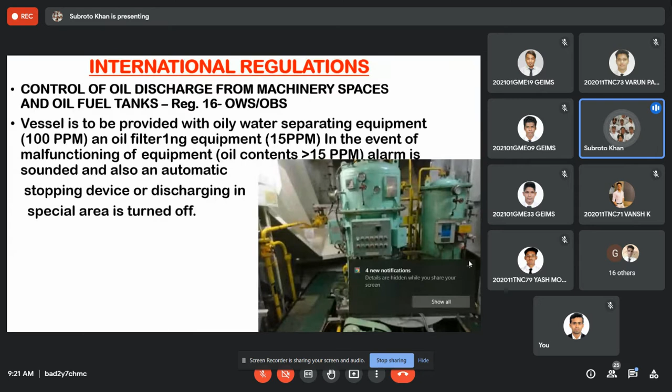So these are the 5 regulations: en route, should not be in a special area, should be less than 30 liters per nautical mile, maximum should not be discharged more than 1/30,000 of the total cargo carried. So if you are satisfying these conditions...

The major equipment related to cargo operations in a tanker is first and foremost the ODMCS, Oil Discharge Monitoring and Control System, which monitors 30 liters per nautical mile and also adds up cumulatively to find out how much oil you have discharged. This equipment is automatic, whether on large or small ships. Once the oil goes more than 30 liters per nautical mile, it will automatically stop.

This is all related to tank cleaning. Here there are no leakages as such, though leakages are also taken care of as part of this. So the major quantity of oily water mixture which comes from cargo spaces is due to tank cleaning. In tankers, it's a regular operation to change grade, and to change the grade you have to do tank cleaning. So when you're doing tank cleaning, whatever oily water mixture is generated is stored in the slop tank.

And from the slop tank, whenever these conditions are met, outside the special area and all that, the criteria is also 50 nautical miles from the nearest land.

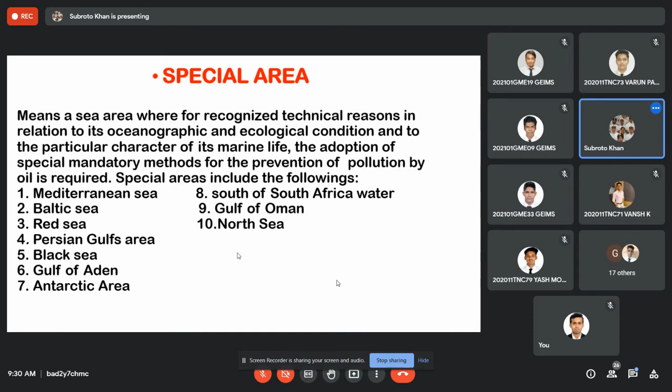Any questions on Annex 1? No question.

Annex 2 is, this is a SOPEP manual and this is a SOPEP kit. This is a SOPEP drill.

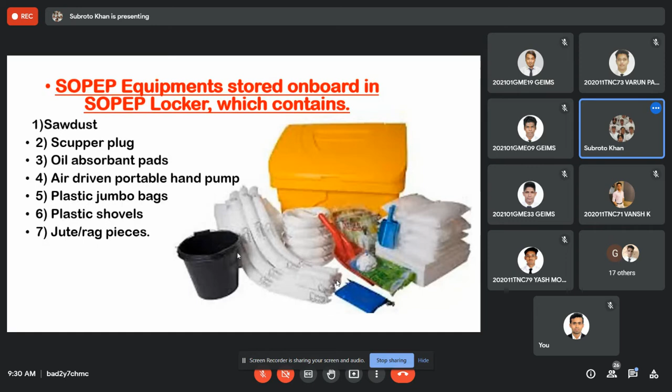Every month, every 2 months, depending on your company policy, you have to have a SOPEP drill, wherein everyone takes part in ensuring that any kinds of pollution is able to be controlled. Once a year, you have a drill with the company as well as the authorities, which may be DGS in our case, Director General of Shipping, and all other authorities take part in that drill once a year.

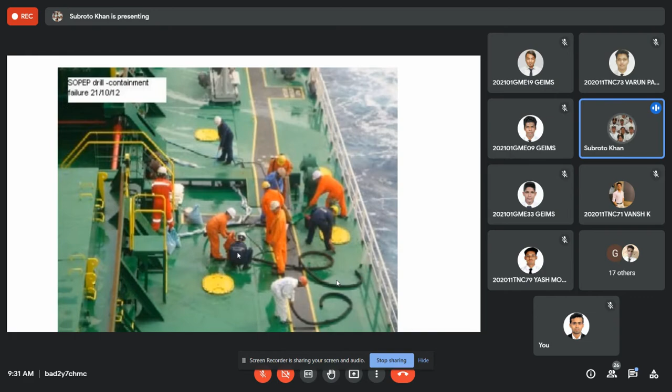So next is Annex 2. Annex 2 also came into force that time, same time, October 83. These are rules basically to ensure that similar kind of ships to tankers, that is chemical carriers, are having regulations related to prevention of pollution. The pollution caused is even more drastic because they sometimes carry toxic material and other kinds of harmful substances which can be very corrosive and harmful, in which case what to do is given in Annex 2.

So broadly speaking, the important part of Annex 2 is the categorization of chemicals. They are technically known as NLS, noxious liquid substances. And in layman's terms, it is called the chemicals, applicable for chemical carriers or NLS tankers. The major part is the construction and categorization of cargoes. The cargoes which are carried on chemical carriers are categorized depending on their hazards to the sea when they come into contact with the sea, and they are categorized into X, Y, Z, OS.

X, Y, Z, OS. X being the most hazardous, Y being lesser than X, and least being Z. Whatever does not fall into these categories comes into OS, and OS is absolutely harmless, similar to fresh water. So the categorization of the cargoes is X, Y, Z, OS, and depending on how hazardous the cargo is, which is X, you have different rules.

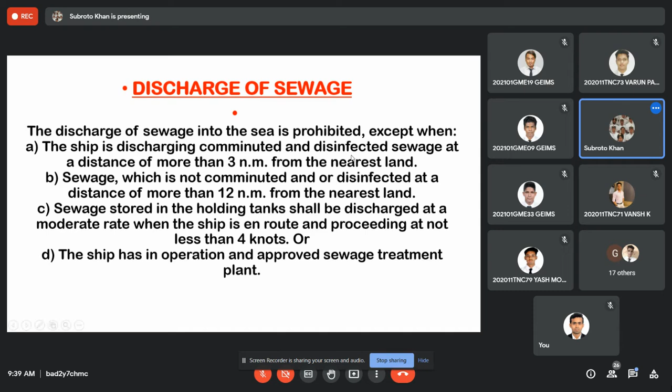Again, so this is in short about the sewage regulations. Got it?

Okay, sewage done. Next is garbage. It's very simple. Earlier it was all complicated because there was a lot of categories of garbage which could be thrown overside, like glass and tin and wood, all had different regulations and made life complicated for the ship staff.

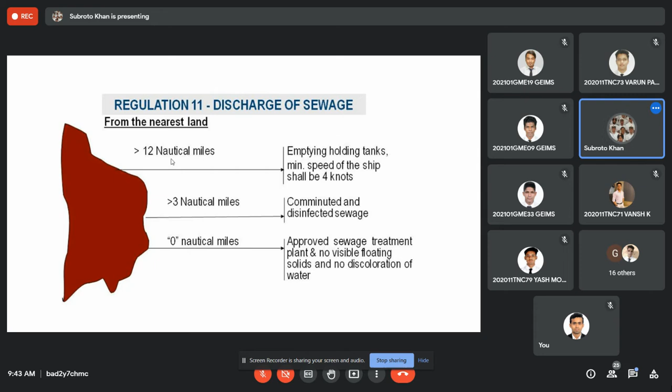Shore reception facilities, that is the last resort. But everything you cannot discharge to shore facilities, and you have to store the garbage till the time you reach the port. At times you may not reach port, you may be at anchorage, or at SBM or sea terminal, where it is very difficult to get these facilities offshore.

In which case you have to store it and incinerate it, which is the best option possible. But certain cargoes cannot be incinerated, certain garbages cannot be incinerated, like plastics, and you have to know how your incinerator functions and accordingly use it.

Everything has to be recorded in the garbage record book, and there's a garbage control officer, which is likely to be chief engineer or chief officer in some cases, depending on the company policy. MARPOL does not tell you who should be; MARPOL says someone should be a responsible person. Mostly chief engineer or chief officer is responsible for managing the garbage on board, in which case he has to ensure that the garbage log is maintained, the equipment is maintained, and everyone is trained accordingly.

Garbage regulations have got some other requirements also. It has to have a garbage management plan, garbage management log, and also garbage related posters should be readily posted in all locations such that everyone is aware of what is to be done and what is not to be done. So three things: placards, garbage management plan, and garbage record book is the paperwork associated with garbage management. And of course, everyone should know the do's and don'ts.

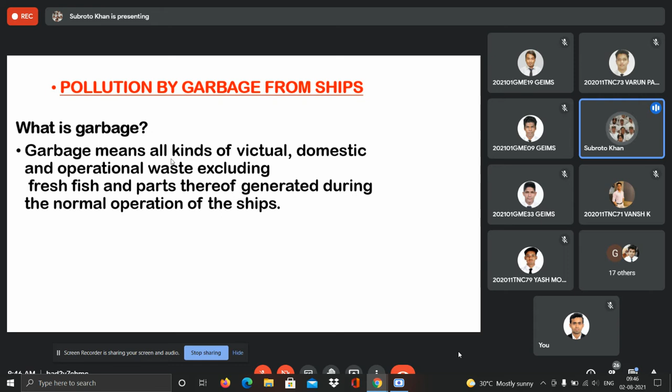Any questions? No questions, sir. Okay.

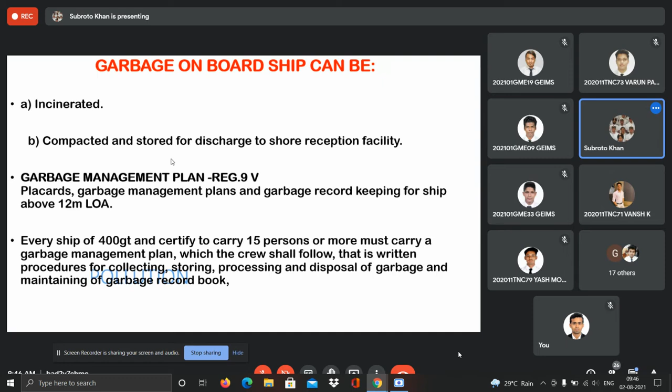This is a summary of the requirements to comply with the garbage rules and regulations of MARPOL.

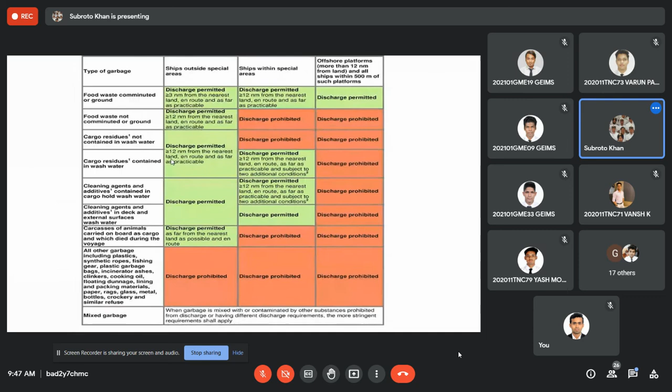Food waste is in the galley, which is blue in color. Domestic waste is green in color. Oily rags and cooking oil is black in color. Incinerator ash is gray in color. Operational waste is in the engine room, which is yellow in color. And hazardous waste is red in color.

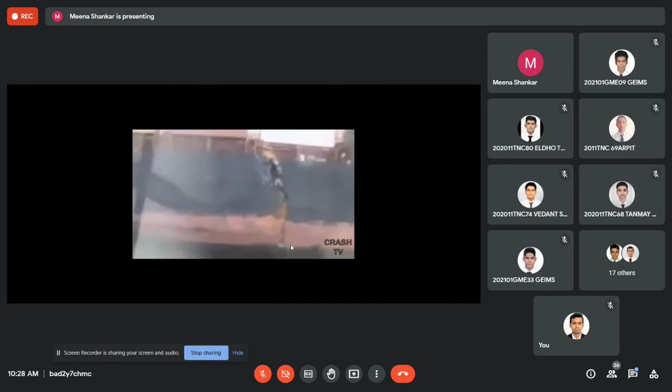It's just broken in the center. See the cargo, just listing to one side. It has made the ship also lose its balance. That is called cargo stowage, has to be done properly. It hasn't been done.

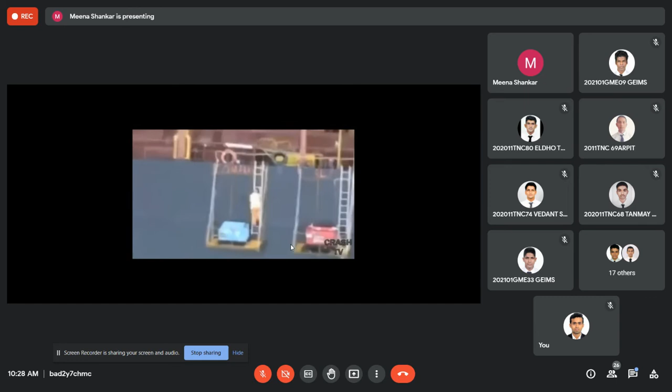Maybe they had to do the jettison of the cargo.

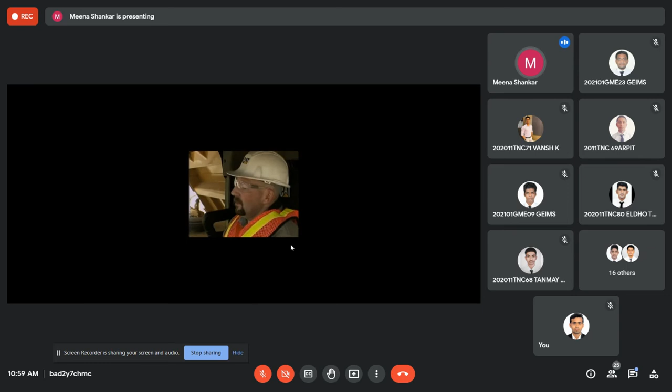Before we look at ways to reduce the possibility of fatigue, it's important to recognize the symptoms: sleepiness, difficulty keeping your eyes open. These are all the symptoms of fatigue. You're not able to keep your eyes open, it is closing. They'll ask you what are the symptoms of fatigue.

Excessive yawning, blurred vision - you're not able to see well, not that you lost your sight. Loss of focus, irritability - you're getting angry for no reason. Becoming quiet and withdrawn - you suddenly become quiet and learn to be away from others. Inability to concentrate - you're not able to focus on the keywords or main points.

Can't remember what you did in the last 5 minutes - memory loss. Lacking motivation to do a task well - lack of motivation in doing tasks, you don't like to do the work. Sound familiar? Sure they do. We've all experienced some of those problems.

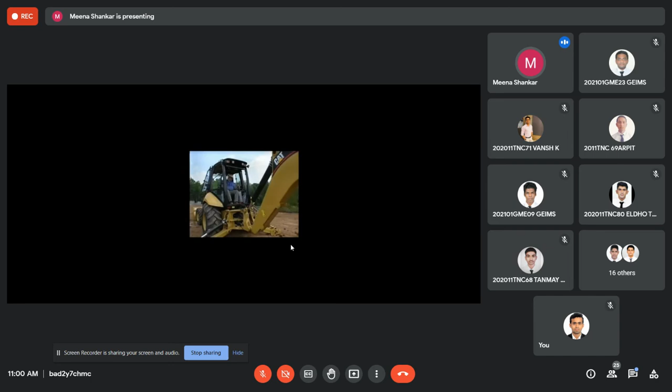It's even more likely you've experienced those symptoms if you work outside the typical workday. Our bodies are designed for peak performance in daylight. That unchangeable fact of life creates challenges for the high percentage of people who must work long hours, nights, irregular shifts, or at high altitudes. This shift work creates unique lifestyle issues - it affects your sleep, your alertness, your overall health, your family and social life, and your safety.

Minimizing the impact of those issues starts with taking charge of your life. It starts basically enough with those key health practices we all learned years ago: diet and exercise. Note this down, very very important to avoid fatigue is to keep your diet and exercise on.

For a longer energy boost throughout the night shift, eat a high-protein, low-fat dinner centering on lean meat, skinless chicken, or fish. Complex carbohydrates work well too - those include pasta, rice, or potatoes, whole grain breads and breakfast cereals, fruits and vegetables.

But it's more than just eating the right foods - it's avoiding the wrong foods, like fatty red meats, pastries, salty snack foods such as potato and corn chips, whole milk dairy products, and candy, which can provide a short energy burst but is followed by a crash to a more fatigued state than before. High carbohydrate diets are best for those working at high altitudes, where large meals are poorly tolerated. Non-caffeinated beverages such as cocoa, juices, soup, or sports drinks are good choices, and drinking plenty of water is important for everyone at any altitude.

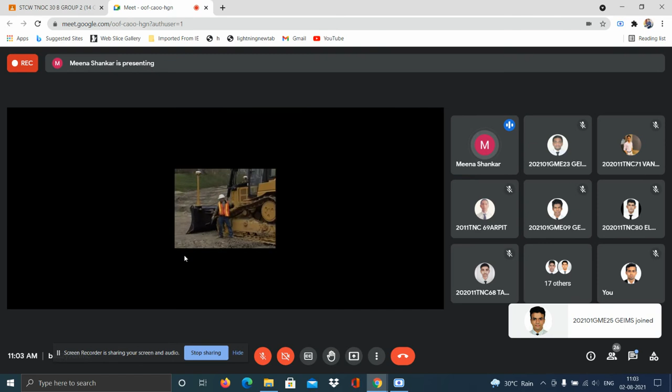Exercise can have tremendous physical and mental health benefits. But exercise can also improve alertness and combat fatigue. Shift workers who exercise regularly feel much less fatigued and experience fewer muscle and back problems. They also make fewer mistakes than coworkers who do not exercise regularly. High-intensity workouts aren't necessary - low-level exercise, even taking a walk during your break, may help maintain your alertness. Just doing enough to elevate your heart rate for 20 to 30 minutes several times a week can work wonders.

For the third key way to reduce fatigue: sleep. He spoke about diet - high protein and less fat. Exercise is very important to avoid fatigue and remain alert. In diet also, he says candy will give you energy, but it might add up over time and become negative because sugar level goes up, and it might make you feel tired.

Sleep is the third thing. We've discussed the obvious advantages of sleep, but those can often be elusive to those who must sleep during the day.

Our bodies are programmed for night sleep, so daytime sleep can be shorter and poorer quality than night sleep. Shift workers quickly find it helpful to develop a pre-sleep routine. Anything done regularly, from reading to watching television to listening to music, can help your body acknowledge you are preparing to sleep. Shift workers also learn to manage their sleep environment as much as possible.

That means controlling factors like light - keep the room as dark as possible, or wear a sleep mask. Noise - use a fan or earplugs to block noise. Temperature - a room temperature around 65 to 68 degrees Fahrenheit, 18.3 to 20 degrees Celsius is best for sleep. Blankets - use them to stay warm and induce sleep. Air circulation - use a fan to ensure good airflow.

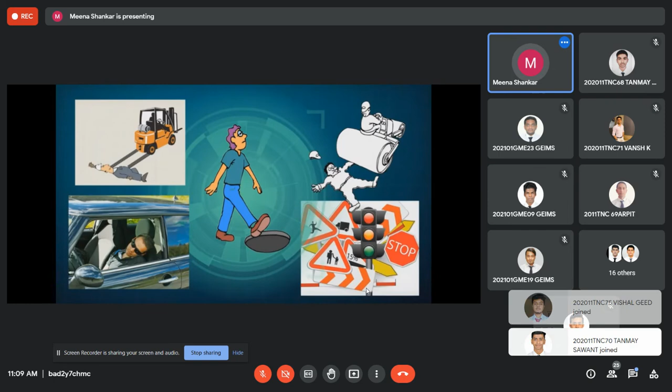That's enough time to run off the road, hit someone with a forklift, run a red light, or be able to get yourself or others out of harm's way. They don't call them split-second decisions for nothing. Sometimes that's all you get, but if you're tired, it's harder to make a split-second life-saving decision.

Lack of sleep impairs your ability to make good decisions. Reducing your nighttime sleep by as little as 1.5 hours for just one night could result in a reduction of daytime alertness by as much as 30%. So 1.5 hours less becomes 30% less working quality.

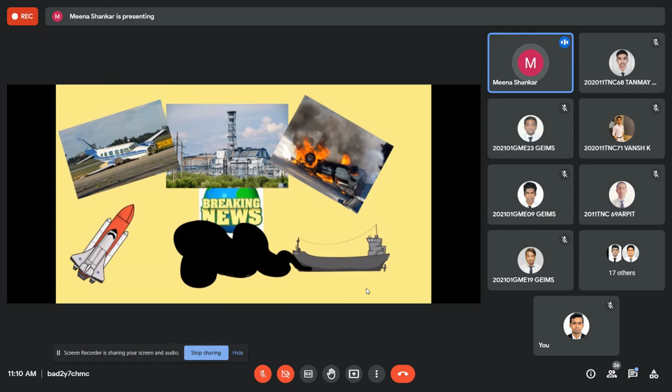Almost every big disaster in recent history has involved sleep loss. 3 Mile Island, the massive Exxon Valdez oil spill, Chernobyl, the Challenger explosion, and many train and plane crashes are linked to sleep deprivation. Out on the road, sleep loss is a huge public safety hazard.

In one study, 1/3 of the drivers reported falling asleep at the wheel in 1 year. In the U.S., drowsy drivers caused more than 500,000 crashes, 100,000 injuries, and 1,600 deaths every year.

Studies show that sleep loss and poor quality sleep will cause accidents and injuries on the job. Workers who experience excessive daytime sleepiness have significantly more work accidents, particularly repeated work accidents. They also had more sick days per accident. Getting less than 6 hours of sleep actually doubles your chance of a work-involved injury.

A lack of adequate sleep not only makes it harder to concentrate on work, it can also distort your ability to see hazards, make you less alert, and interferes with your ability to think clearly and critically about problems you encounter throughout your day.

Sleep plays a critical role in thinking and learning. Since lack of sleep affects your ability to pay attention, your alertness, concentration, reasoning, and problem solving, it is more difficult to learn and to think clearly.

Ever try to reason with a drunk? It has been proven that losing sleep can cause you to become more impaired than a drunk. Lack of sleep affects your judgment and your interpretation of events. This makes it harder to apply your training and experience, assess situations accurately, and act on them correctly.

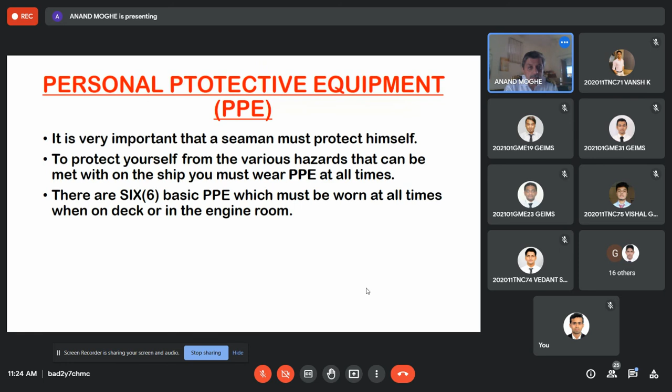What are the PPE which are expected to be worn? Boiler suit, helmet, gloves, safety shoes, safety goggles, ear protection. There are other PPE required when working under especially hazardous situations or locations, but the above are absolutely necessary at all times, whatever is written above will be worn. In addition, if you're on a chemical tanker or gas tanker, you will wear SCBA or a chemical suit or other additional PPE. But the above which I mentioned are absolutely necessary and have to be worn at all times. Copy down.

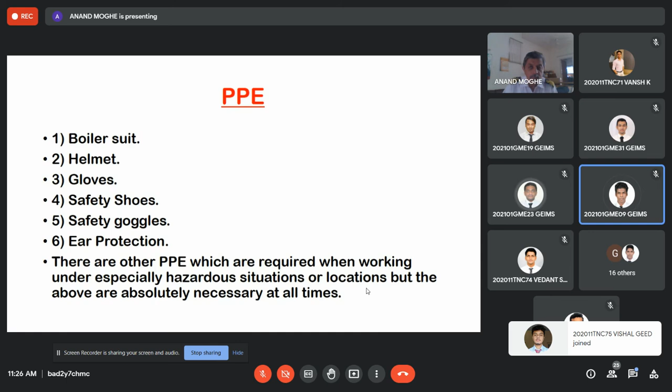Yes, copied gentlemen. Done with it, completed sir. Okay, next what I'm going to talk about is risk assessment.

Everything in life has some risk. What you have to learn is how to navigate it. So when you guys came to Bombay, those who came to the campus from their hometowns, some wore PPE throughout and removed it only at the campus gates. Some carried bottles of sanitizer, kept sanitizing, wore a mask. So everybody evaluated the risk, the time of travel, the modes of transport, how much they were exposing themselves, and accordingly, keeping the COVID-19 risk in mind, they navigated the risk. So anything you do, whether buying a car, making a financial investment, or putting your child in school, you will do a risk assessment. Everything in life has a risk; what you have to learn is how to navigate it. Make sure that you do risk assessment for everything that you come across.

Before you do a risk assessment, you evaluate what is the risk, what is the amount of exposure you're going to have to that risk.

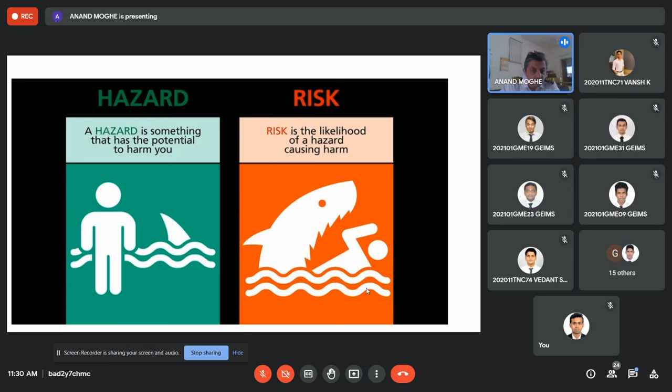Take a snapshot please. Taken, sir. Taken, okay one more snapshot. Can you see? Ek minute, I'll just. Yeah, can you see now? Taken a snapshot, I've taken a snapshot. Hello, yes hello sir, taken.

Next, I will come to what are the hazards on board. There are many hazards on board a ship which are part of the daily routine work on the ship. The majority of the hazards are mentioned below, but remember the list is not exhaustive. I'm trying to cover as much as possible, but that does not mean the list is by any means complete. There will be new hazards which come up, like working on computer circuits, that is a major hazard not mentioned over here.

I hope the TNCs and GMEs are answering over here. Yash Moharia, Yash Acharya, Varun, are you there? Yes sir, yes sir. Syed Baba Rahim? Yes sir. Yash Moharia, Yash Moharia. Somebody just call him, he's not present. Who's the leader of this group? No leader over here. Vansh, call Yash Maharia. Eldho, calling sir, call Yash Maharia. Eldho, come in, yes sir. Vansh relax, Eldho you call him. Vishnu, are you there? Vishnu P, yes sir. GME roll number 22, are you there? Yes sir. GME roll number 9, are you there? Yes sir. Vishal Geed, are you there? Yes sir. Okay gentlemen, once you finish copying let me know, I'll change the slide. Yes sir.

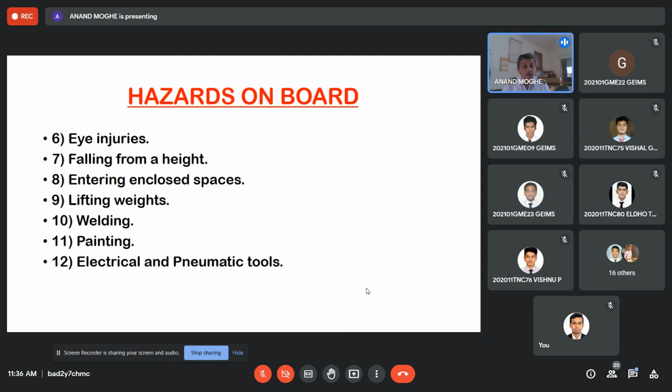Have you copied? Yes sir, done sir. Okay next: electrical appliances in living spaces, welding, cooking in galley.

The numerous hazards that can be encountered on the ship, the most important lesson is to be aware and vigilant at all times. There are numerous other hazards, please understand I cannot be listing all of them. It's not possible to mention each one, any work you do will have a hazard. If you're working with pneumatic air, there'll be hazards. So remember, there will be plenty of hazards, but your job is to make sure you're aware of the work you're doing and vigilant not to injure yourself at any given point of time.

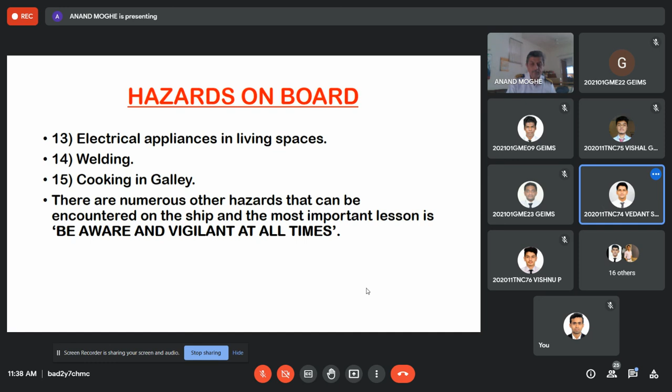Loading, discharging, loading and unloading of cargo on board can by their nature be hazardous. The danger on tankers, gas and chemical carriers is obvious in the nature of the cargo. Even on bulk carriers, containers, general cargo carriers, there are many dangers. Copy down, I'll be listing them individually, but just copy this down please.

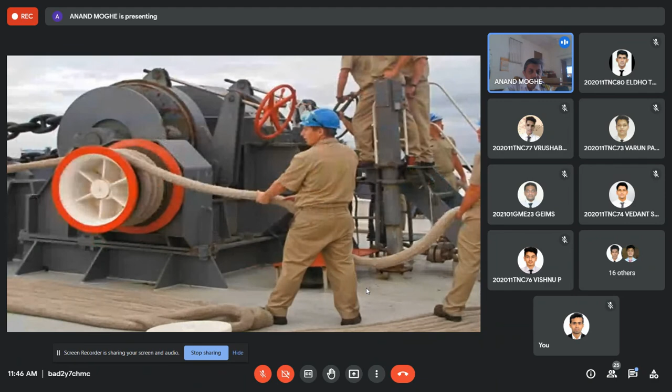Can somebody tell me about these mooring hawsers? Have a look at them, I'll show you these mooring hawsers, that is the size of the mooring hawser. Look at the guy's arm, you can get an idea of how big the hawser is because it's a guy's arm next to the hawser. Can you see that? How big it is?

This is a 64mm hawser. Can you tell me how many kgs of weight it takes? Any rough guess, anybody? Can somebody tell me what minimum safe working load must be there for these ropes? Varun? Sultan? Tanmay? Anybody, can you tell me, GMEs? What is the rough weight that these hawsers' safe working load must be? GME 21, can you hazard a guess? Eldo, I want people to participate, this is not a single forum. I'm not going to talk unilaterally, this is going to be a discussion, so dialogue, not monologue. Please talk to me. Can somebody tell me anything else? GME 19, are you with us?

Yes sir. Can you tell me how much is the safe working load of these hawsers, roughly? It's about 30 to 40,000 kgs. So 30 to 40 tons. How many kgs is 1 ton? 1000 kgs. So 30 to 40,000 kgs or 30 to 40 tons is the safe working load. So when they break, they really break with a lot of noise and a lot of power, so be extremely careful. Have you copied this down? Copy down.

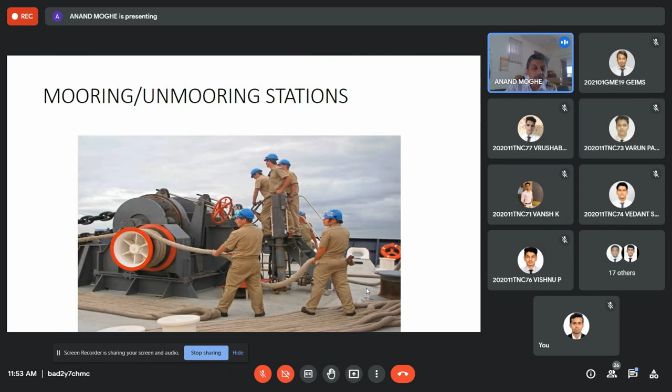Take a snapshot, please. There's a mooring station. Taken? Right, so we have finished this.

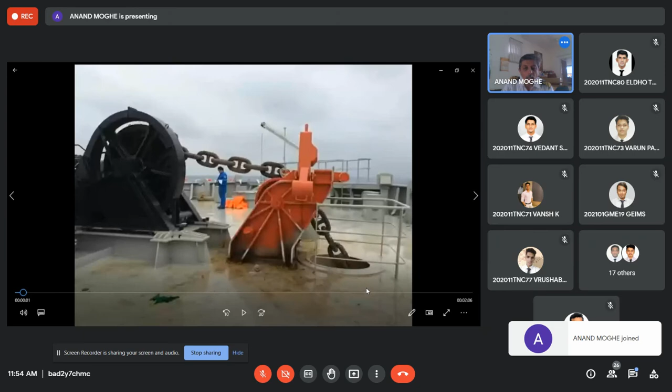Now what I'm going to show you is a video on some dangerous situations, just to give you a feel of things, okay, how dangerous ships can be. Let me know when you can see the video. Can you see the video? Now I'm shutting off my audio, otherwise it will give an echo. I'm shutting off my audio just to show you guys, and I will check whether you can hear and you can see. Just say yes or something so I know if you can hear.

Yes, sir, audible, sir.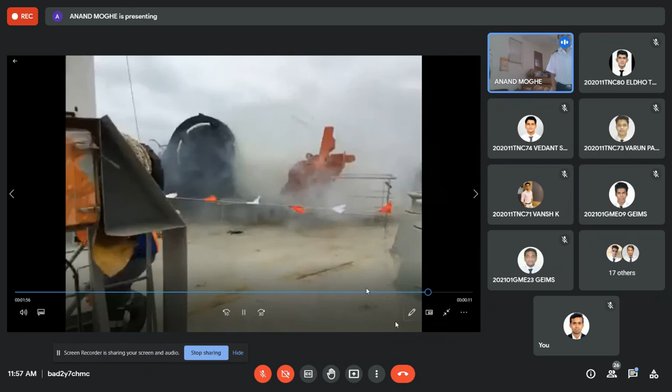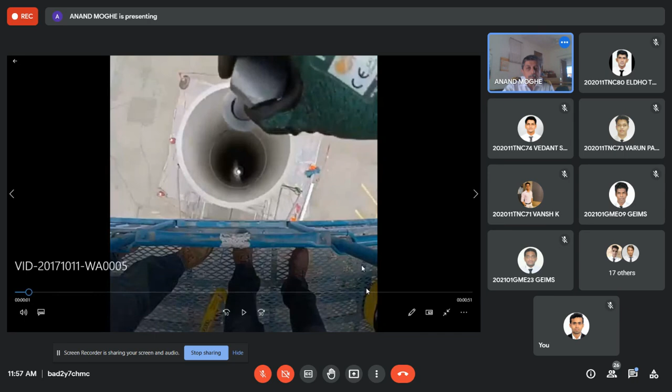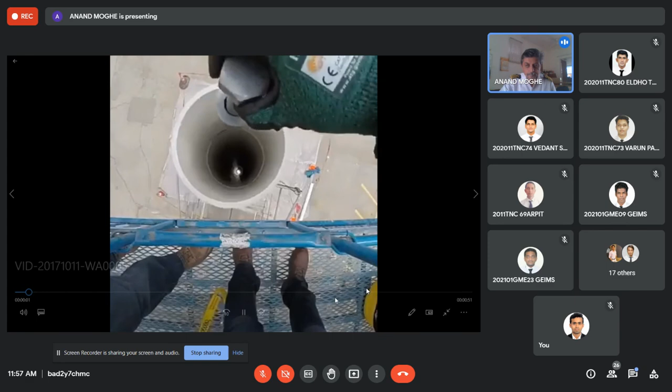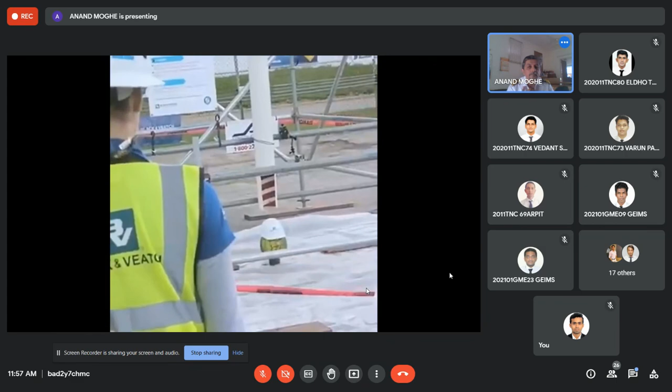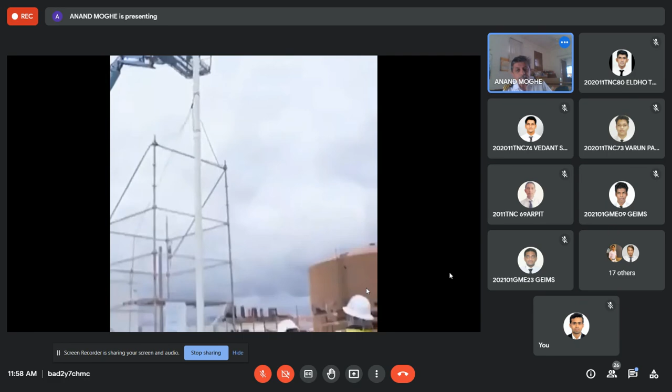Now with the protection of a hard hat. Dropping the bolt from a height of 30 feet, it will now have an impact of almost 3,000 pounds of force. 3, 2, 1. Wowza, wow, that's quite a difference, that did a lot more damage. 10 more feet, now with a hard hat, drop. Whoa, that was like a gunshot. We do have damage down here where his neck would be.

Can you see, gentlemen? Did you see? You saw the hard hat one and you saw the safety harness one also, no?

You saw the safety harness one which I showed you just now? The safety harness falling, you saw that? The girder falling towards them, yes? How many of you think that he expected the girder was falling towards himself? How many of you think he expected that the girder would fall towards that guy?

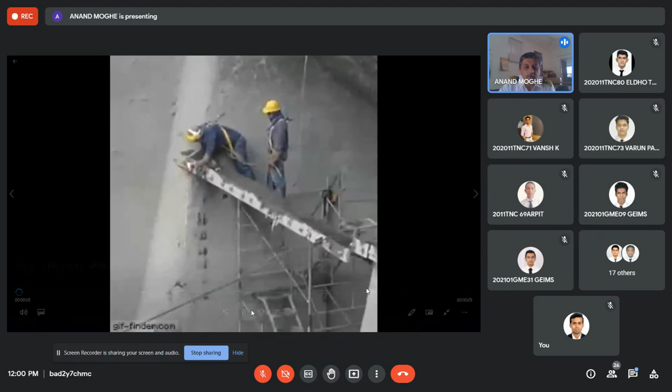I'll show it to you again. Have a look. How many of you think he knew it would fall towards him? Did he know? Was he aware? No, sir, he was not, no?

So whenever seniors tell you to wear your safety harness, please wear your safety harness. You might wear the safety harness 40 times and nothing happens. 40 times nothing happens, but that 41st time when something happens and the safety harness was worn, then the last 40 times become worthwhile. Am I right? Are you with me? Yes, sir.

Forty times you wore it, nothing happened. The 41st time something happened and the safety harness saved you. Then the last 40 times wearing the safety harness was worth it. Yes or no?

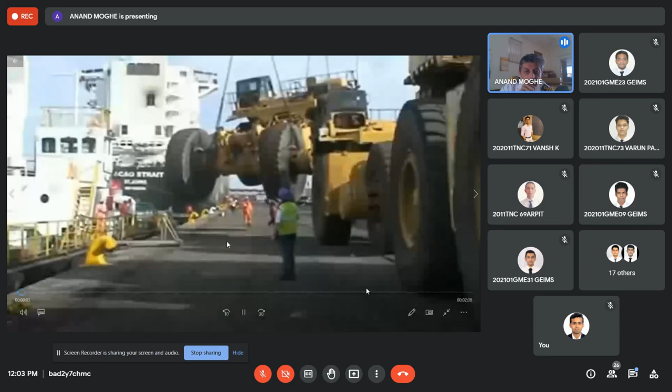Can you see that payloader? Yes sir, can you see that? I'll just switch off my audio so you can hear the audio on that. I'm switching off my audio, gentlemen. Let me know if you can see it.

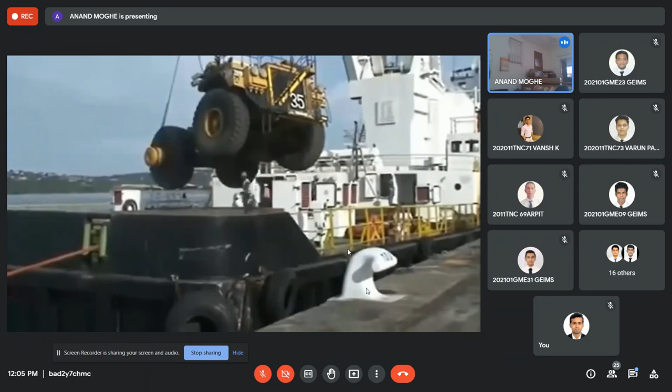Thanks, Bill. Come on, let's mess this up. Fuck's sakes. Chain broke. Fucking hell, oh good God. Oof, now that was a scary moment.

Yes, did you see that? Yeah, like you did take the photos there. Jesus, my goodness, this is, you see the guy was at the back.